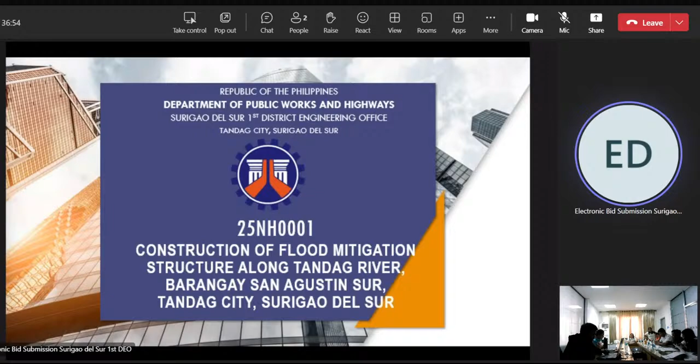Good morning everyone. For contract ID 25NH0001, construction of flood mitigation structure along Tandag River, Barangay San Agustin Sur, Tandag City, Surigao del Sur. Appropriation of 100 million, ABC of 96,500,000, location at Barangay San Agustin Sur, Tandag City, Surigao del Sur.

For the scope of works: facilities for the engineers, 3.21%; general requirements, 0.38%; earthworks, 2.80%; sub-base and base course, 0.21%; surface courses, 2.48%; other structures, 1.19%; finishing and other civil works, 0.16%; bank and slope protection work, 84%; drainage works, 5.56%, for a total of 100%.

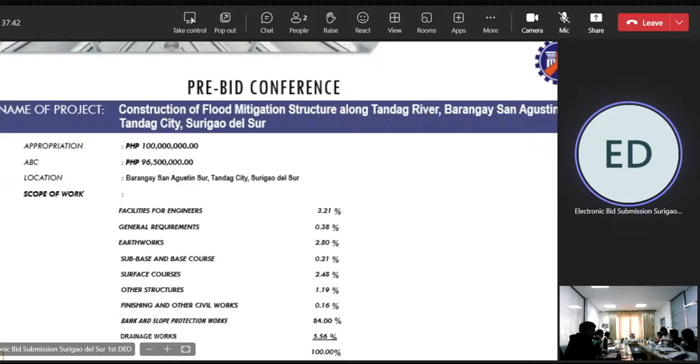Project length, 234.40 linear meters. Project scope, revetment. Contract duration of 304 calendar days. Date of bidding, October 28, 2024.

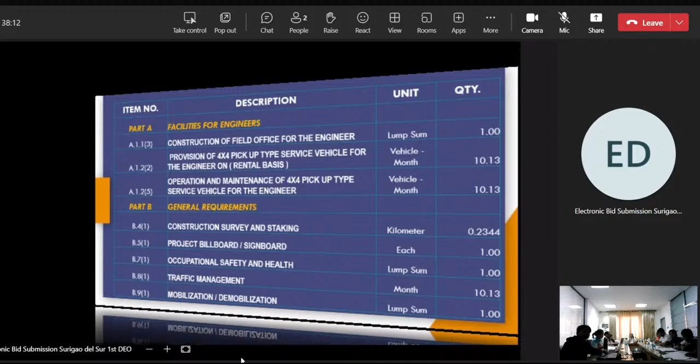For A1.25, operation and maintenance of 4x4 pickup type service vehicle for the engineers, fully operated basis. For B.51, project billboard and signboard, 1 unit 4 feet by 8 feet tarpaulin for DPWH and 1 unit 8 feet by 8 feet tarpaulin for COA. Here's the DPWH standard project billboard and COA.

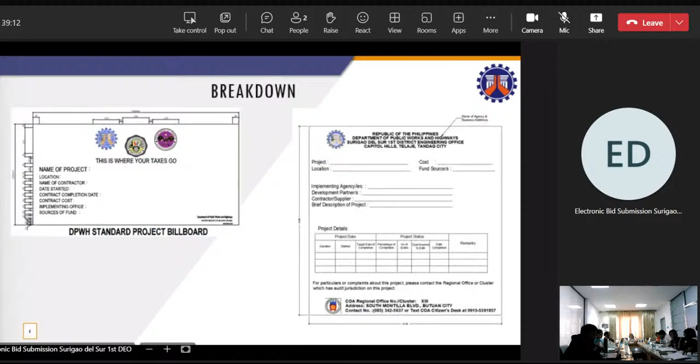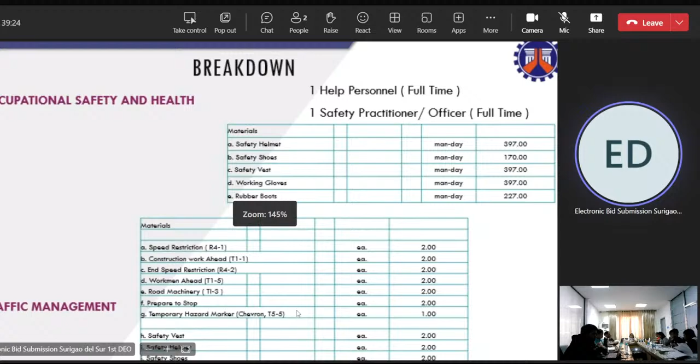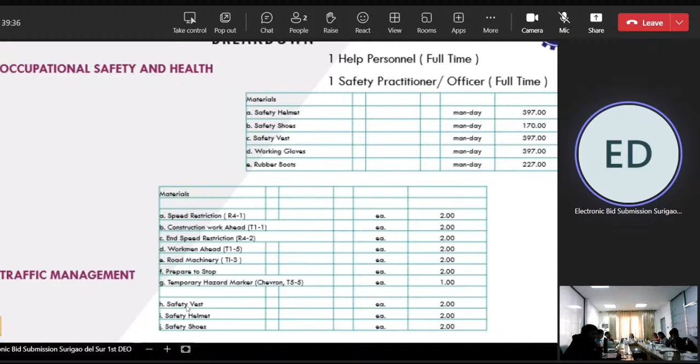For B.71, occupational safety and health, 1 health personnel full-time, 1 safety practitioner/officer full-time, materials, unit, and quantity are shown. Also for B.81, traffic management.

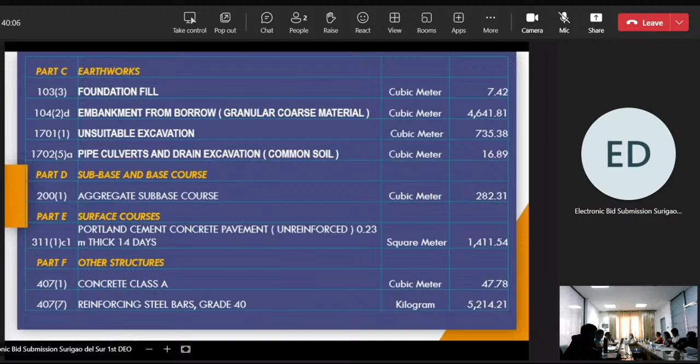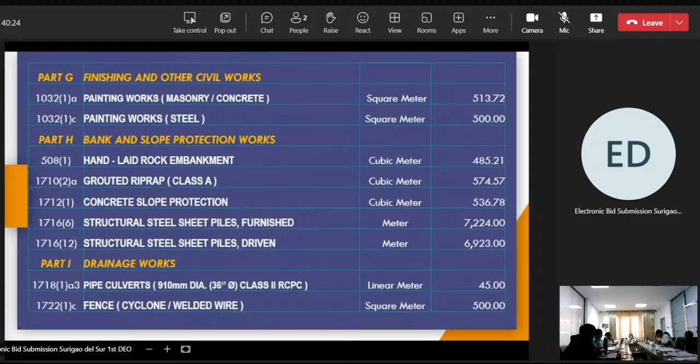For the minimum equipment requirements: 4 dump trucks, 1 vibro hammer, 2 transit mixers, 1 water truck, 2 concrete mixers, 1 concrete vibrator, 2 backhoes, 1 motorized road grader, and 1 vibratory roller, for a total of 15 units of equipment.

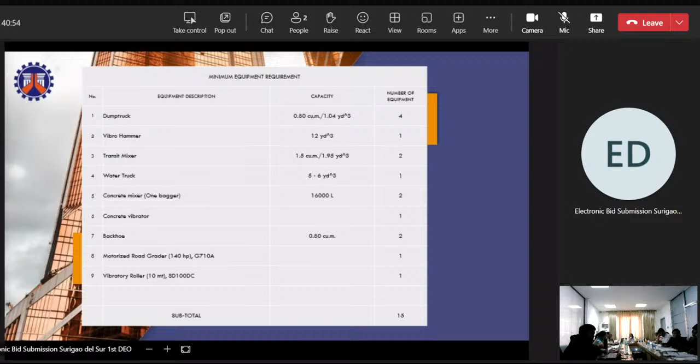For sand and gravel at Carac-an River Quarry, San Juan, with an average hauling distance of 53.01 kilometers from the project site. For embankment, item 200 on boulders at Sotel River Quarry via Airport Mantaya with an average hauling distance of 9.21 kilometers from the project site.

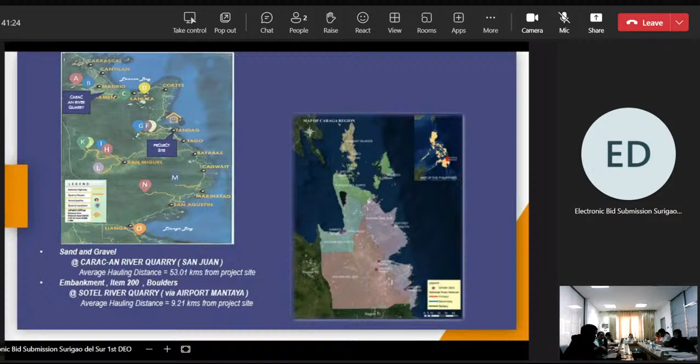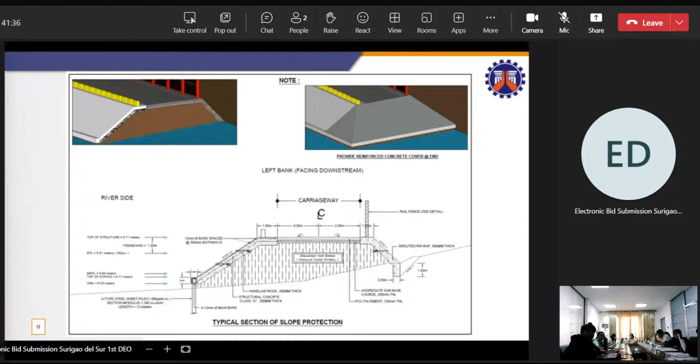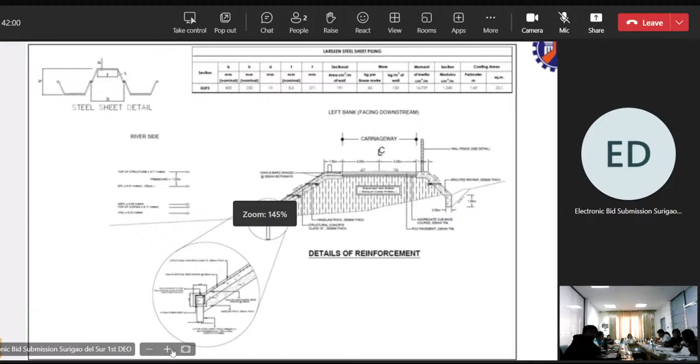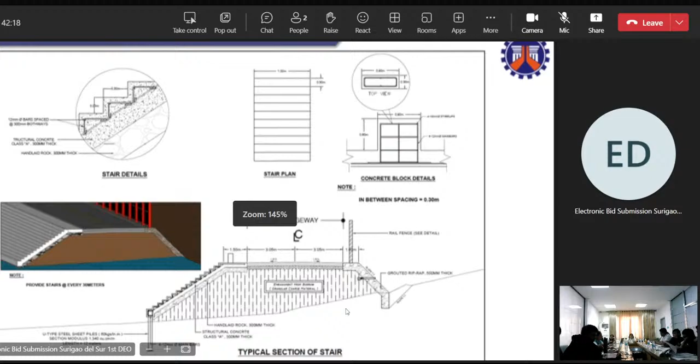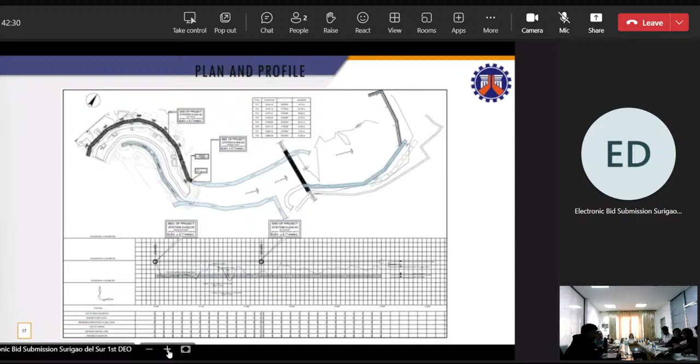For plan and profile, beginning at station 0 plus 00 and at station 0 plus 234.4. End of presentation.

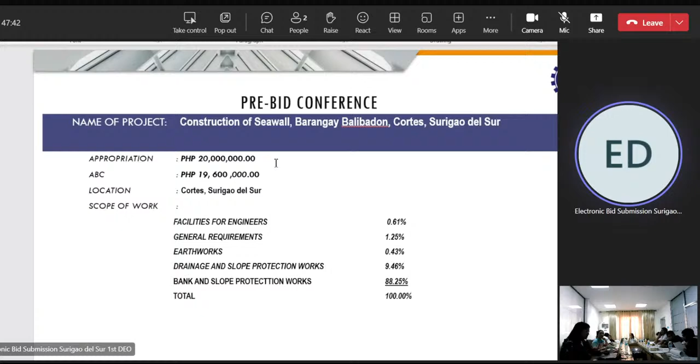Good morning. For the project ID 25FH0002, construction of Seawall, Barangay Balibadon, Cortes, Surigao del Sur. The appropriation is 20 million and ABC 19,600,000. Location: Cortes, Surigao del Sur. The scope of works are: facilities for engineers 0.61%, general requirements 1.25%, earthworks 0.43%, drainage and slope protection works 9.46%, bank and slope protection works 88.25%, a total of 100%.

For the project length, 150.80 meters. Project scope: Seawall. Contract duration: 188 calendar days. Date of bidding: October 28, 2024.

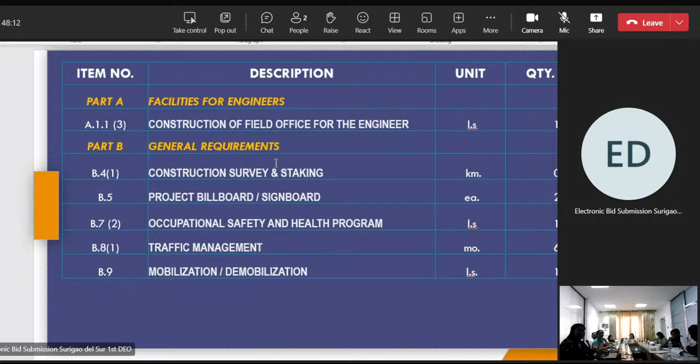For Part A, facilities for engineers, and Part B, general requirements, the item numbers, description, and quantities are shown. For item A.1.1.3, construction of field office for the engineer, there is 1 unit field office, bunkhouse type. For B.5, project billboard or signboard: 1 unit 4x8 tarpaulin for the DPWH and 1 unit 8x8 tarpaulin for COA.

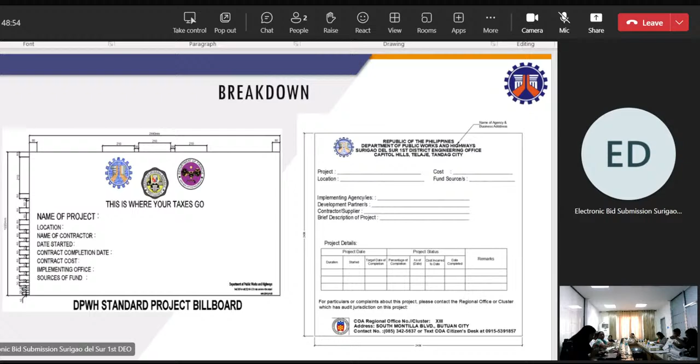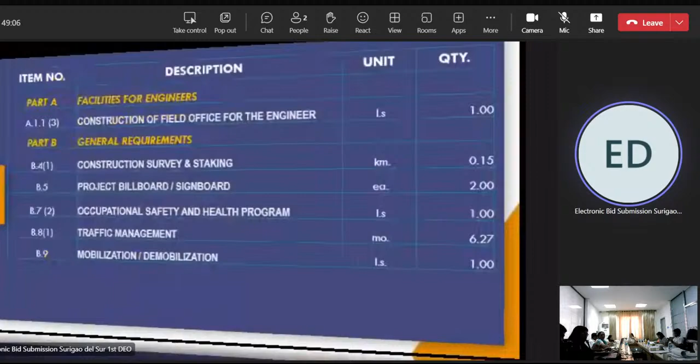This is the DPWH standard project billboard and for the COA. For B.7, occupational safety and health program: 1 first aider and 1 part-time safety practitioner. For B.8.1, traffic management, the materials are shown.

For Part C, earthworks, Part D, drainage and slope protection structures, and Part G, bank and slope protection structures, the item numbers, description, and quantities are shown.

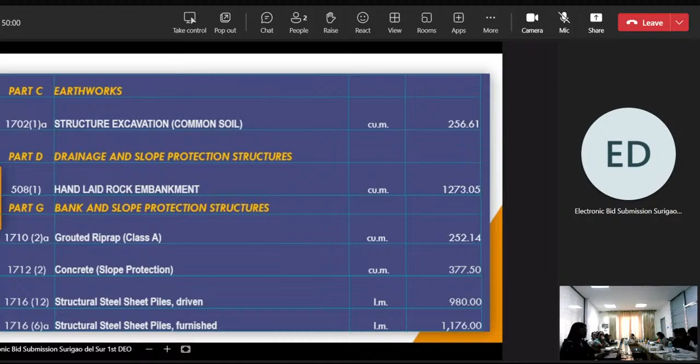Here are the minimum equipment requirements: 4 dump trucks or similar, 1 water truck, 1 transit mixer, 1 backhoe, 1 boom truck, and 1 cargo service truck. Total of 9.

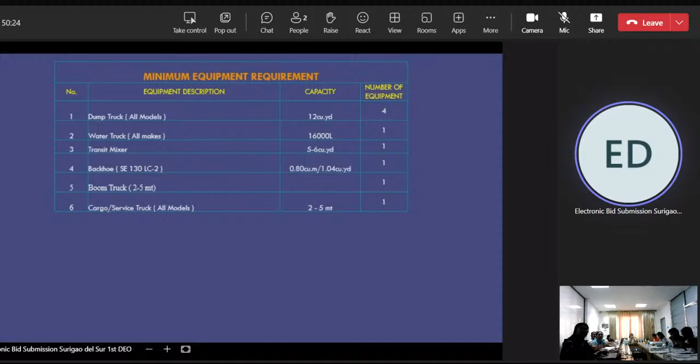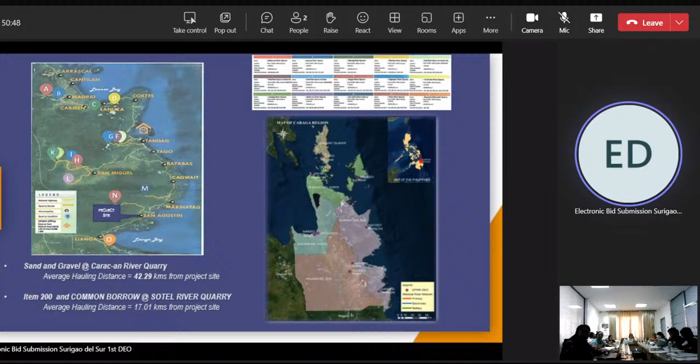For the quarry source, sand and gravel will be at Carac-an River Quarry with an average hauling distance of 42.29 kilometers from the project site. And for item 200 common borrow will be at Sotel River Quarry via Amontay Road with an average hauling distance of 17.01 kilometers from the project site.

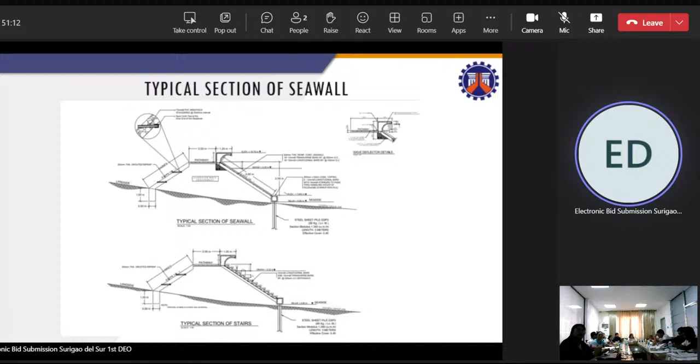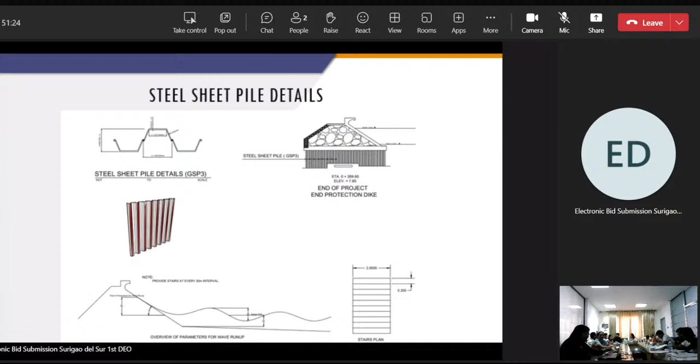Here is the typical section of seawall and the typical section of stairs. Here are the steel sheet pile details for GSP3.

Beginning of project will be station 118 and end of project will be 268.3. Thank you, that's all.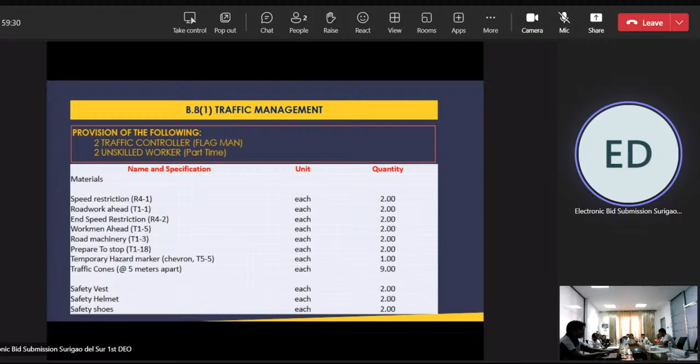For Part A, facilities for the engineer, item number, description, unit and quantity are shown. Part B, general requirements, item number, description, unit and quantity are shown. Part C, earthworks, item number, description, unit and quantity are shown. Part D, sub-base course, item number, description, unit and quantity are shown. For Part E, bridge construction, item number, description, unit and quantity are shown.

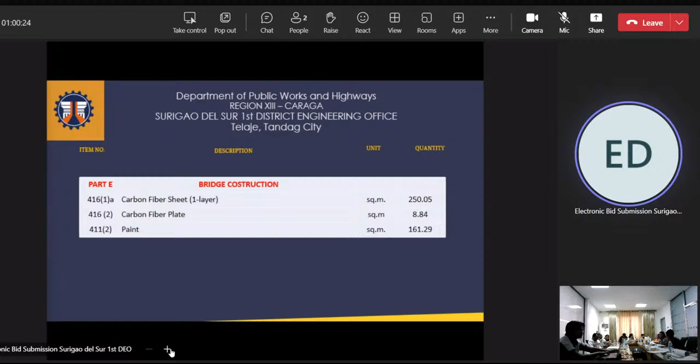For Part F, bank and slope protection works, item number, description, unit and quantity are shown. Part G, miscellaneous structures, item number, description, unit and quantity are shown. Part H, material details, item number, description, unit and quantity are shown.

For minimum requirements: backhoe 1, dump truck 1, concrete mixer 1, water truck pump 1, with a subtotal of 4. For plans,

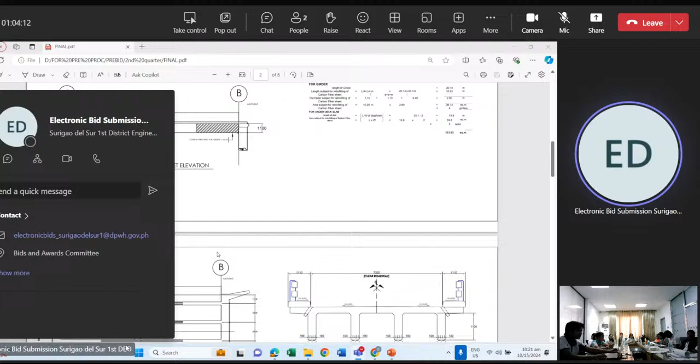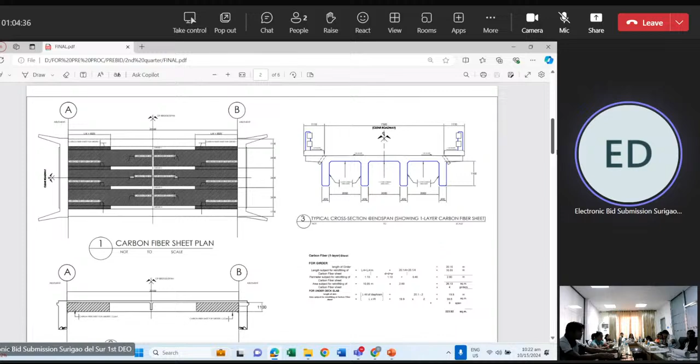For plans, we have general plan, general elevation, and carbon fiber sheet plan, carbon fiber sheet elevation with a typical cross section, carbon fiber plate plan, carbon fiber sheet plate elevation, typical cross section.

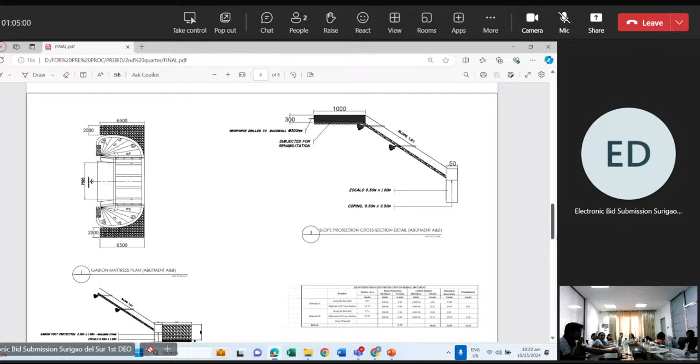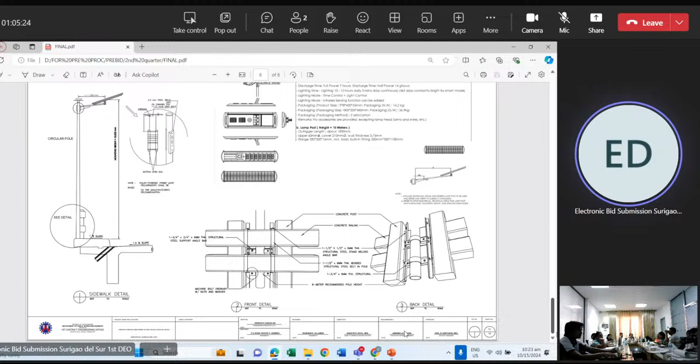Gabion mattress plan, abutment A and B, and detail of the gabion mattress, slope protection cross section detail, abutment A and B, solar street light plan, sidewalk detail for solar light, front detail, and back detail.

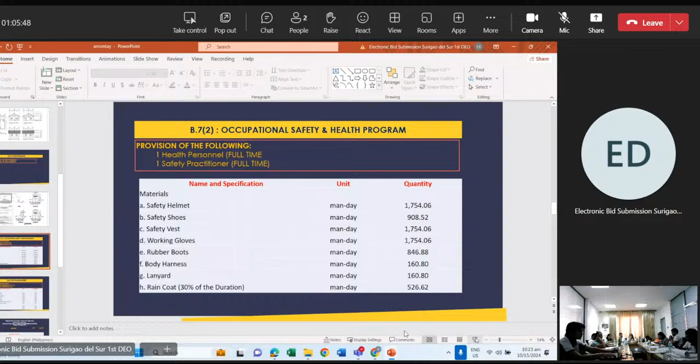And that's all. Okay, thank you, Engineer Basilote.

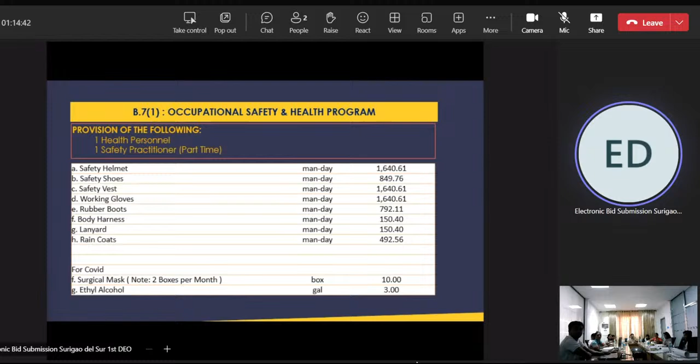Breakdown: construction of field office for engineer, 1 unit field office bunk house type. 1 unit DPWH tarpaulin and 1 unit for tarpaulin. Occupational safety and health program provision: 1 health personnel and 1 safety practitioner, with materials for occupational safety. Traffic management provision: 2 traffic controllers, flagman, and unskilled worker part-time, with materials for traffic management.

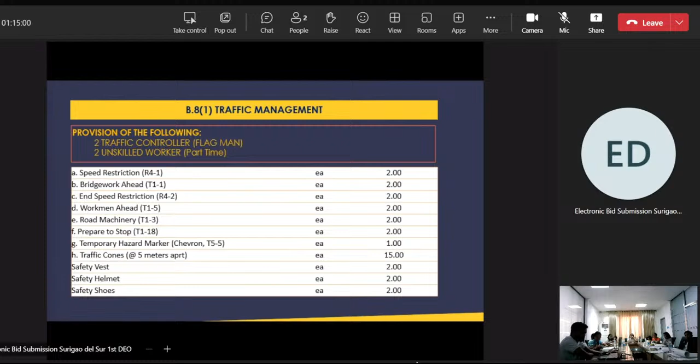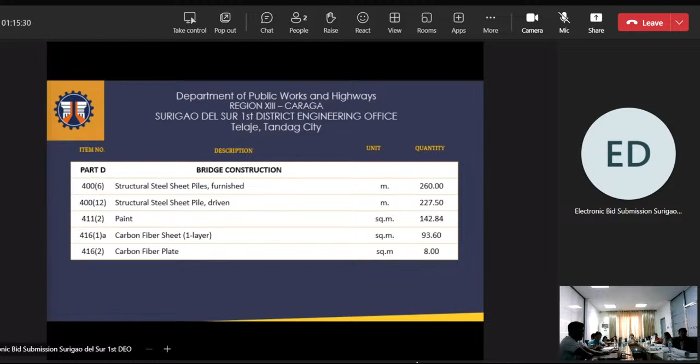Item description, unit, and quantity are shown for Part A, facilities for the engineer. For Part B, the requirements with item number, description, unit, and quantity are shown. For Part C, earthworks. For Part D, bridge construction. For Part E, bank and slope protection works. Part F, miscellaneous structure.

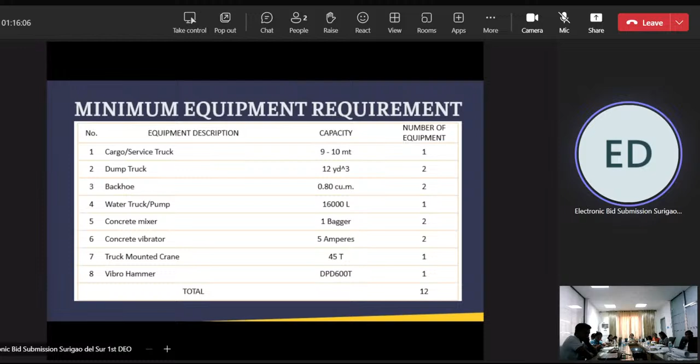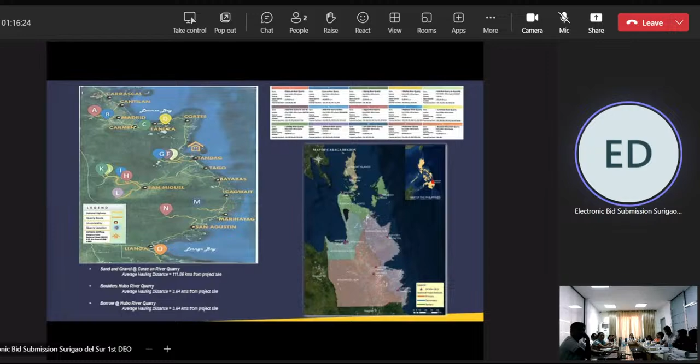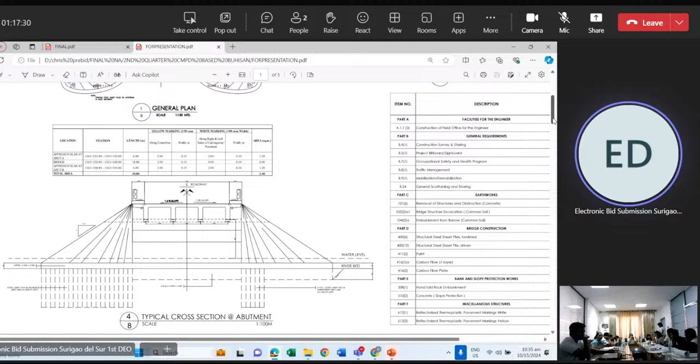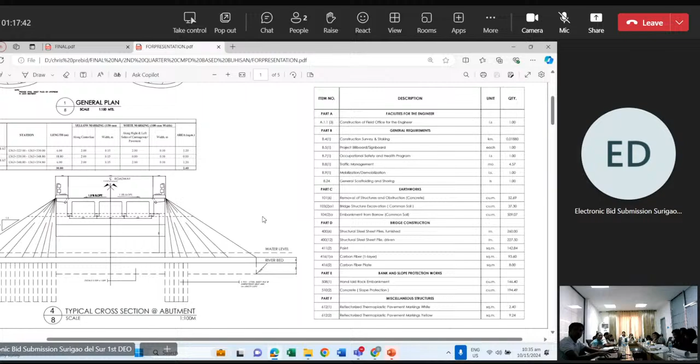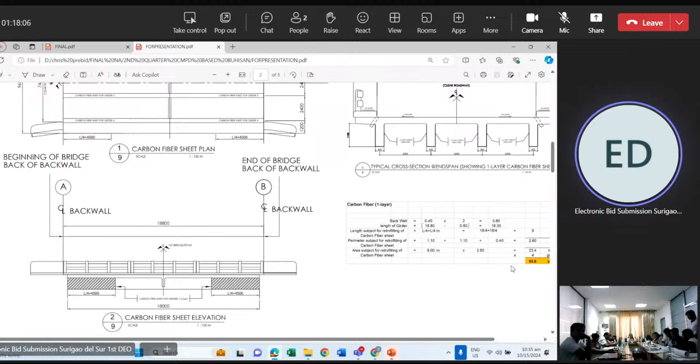Carbon fiber sheet plan, cross-section and elevation shown, along with the quantities and backup quantification. Carbon fiber plate plan, typical cross-section and elevation plan are shown, also with the quantities.

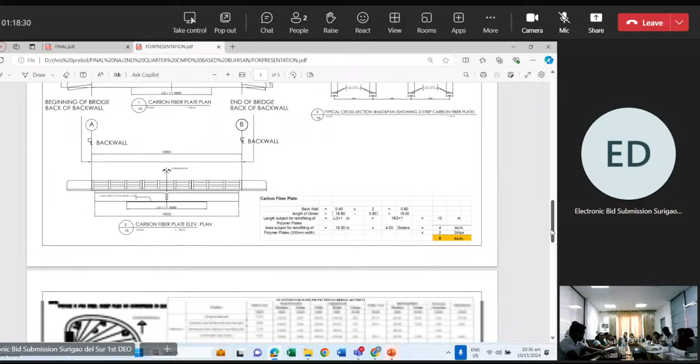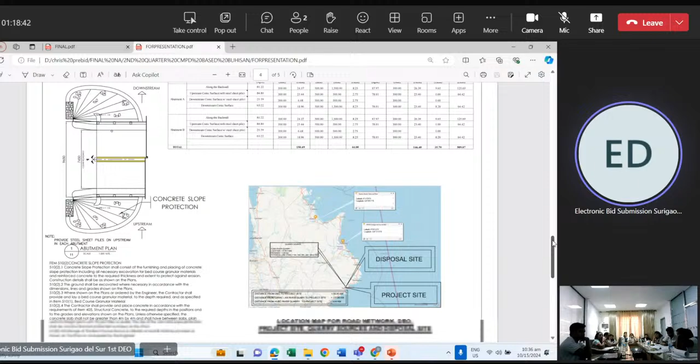Quantities for slope protection, bridge abutment, and abutment plan, location map are shown. Typical section of slope protection, unit fall, and quantities for steel sheet piles, and detail of steel sheet pile GSP3 are shown.

Okay Engineer Tarong, so is there a correction in the review? There's an issue with item B.5 quantification - correction needed on the item number and quantity.

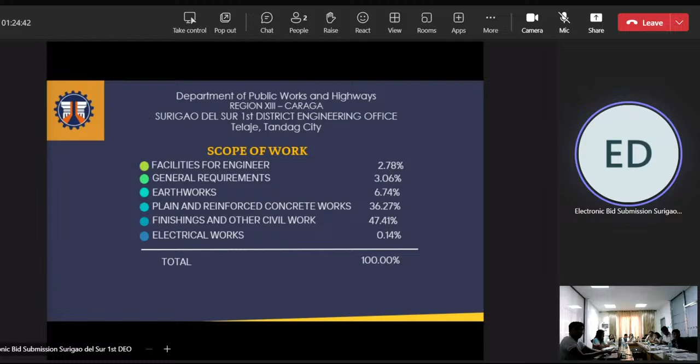Breakdown: construction of field office for engineer, 1 unit bunkhouse type field office. Project billboard, 1 unit 4x8 build-up tarpaulin and 1 unit COA tarpaulin. Provision of 1 safety health practitioner and 1 health personnel. Materials shown, with item number, description, unit, and quantity shown for Part A for the engineer.

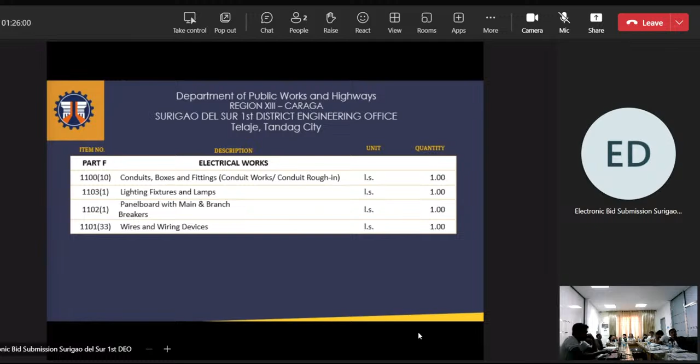Minimum equipment requirement: 1 backhoe, dump truck, compactor, 1 bagger mixer, and 1 vibrator, for a total of 5 pieces of equipment.

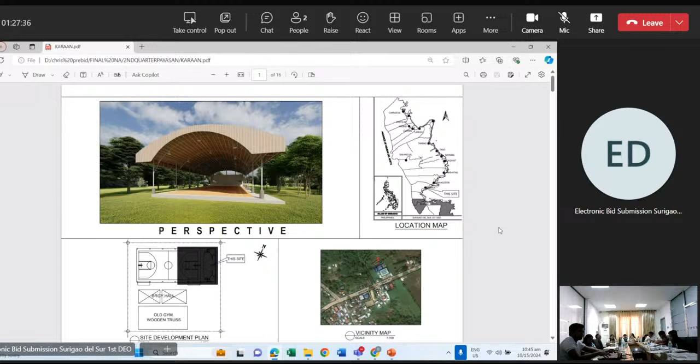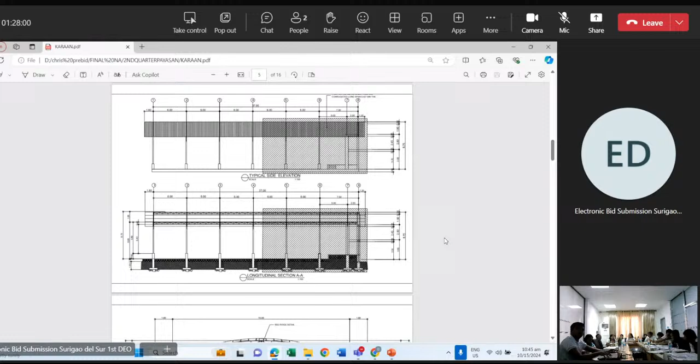For the plans: perspective, location map, site development plan, and vicinity map are shown, along with the plan view, front elevation, rear elevation, longitudinal section, cross section, roof plan, foundation plan, column footing detail, tiling detail, and extended display detail.

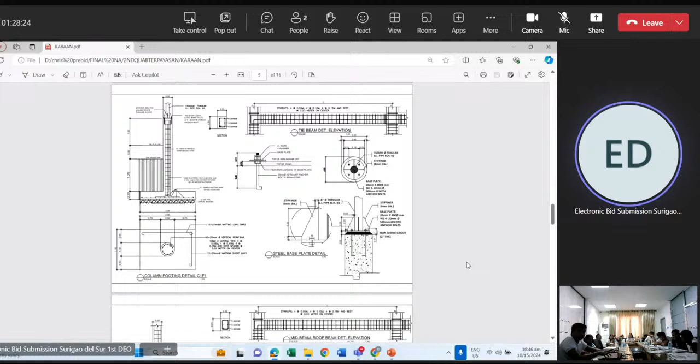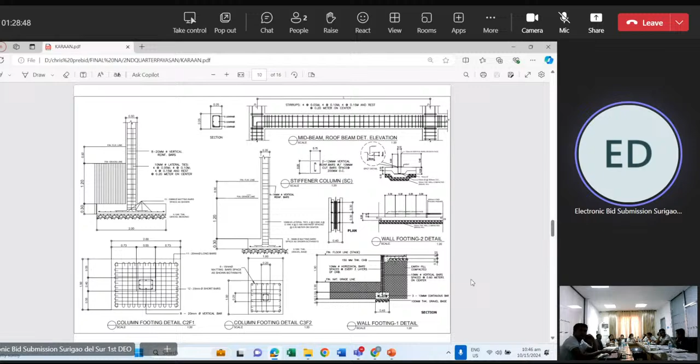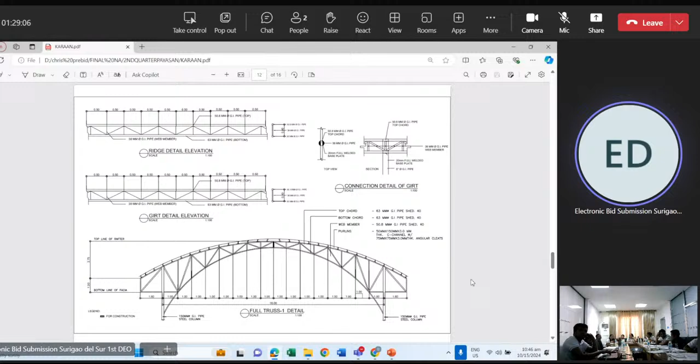Truss detail, including the connection of girts and secondary members. Sanitary plan. Sun and storm drain line plan. Electrical lighting and power layout plan.